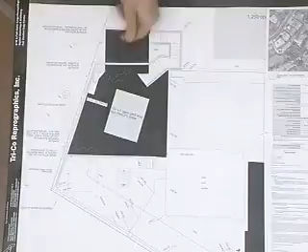Anything else you want to add, or we'll just go through questions and comments? Maybe we'll respond later when we have questions. Okay, at this point I'll go back to staff if they have any comments. No, not at this time.

Did you want to read the motion from the last hearing? Sure, Denise, if you could read the minutes from the prior meeting. We continued this indefinitely to the full board with the following comments: Number one, the board members, staff, and applicants will attend a scheduled site visit prior to the project returning to the full board for continued concept review. The board requests that the city-approved architect's plan set be available during the site visit. That was it.

Okay, so at this point I'll go to public comment. I do have one public comment slip only. If anybody else wants to comment, I'll need this filled out. The only name I have is Grace Dotson. That's not for this project. Are there any people in the audience actually speaking on this project? So I'll close public comment.

Excuse me, Mr. Chair, I did just want to... Oh, we had 3 additional letters, right? Yeah, there were 3 letters of support received: one from Mike Richardson, one from Phyllis Hollums, and one from Avo Submergian. Thank you.

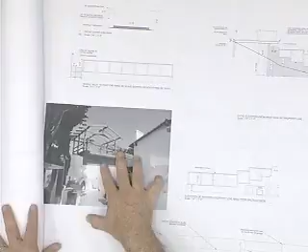When you do go through that process, you might have to come back for tweaks in the design. But basically what Fred is saying is the deletion of some items that are out there, or as-built items, and the incorporation of the rest of the items that were not permitted are basically acceptable.

Mr. Chair, if I may address Bernie's comment. One of the things that we can do, at least under the Robert's Rules of Order that I know about, is there is a motion on the floor that gives general direction and approval right now. But if there are specifics, say for instance the glass issue on the railings, someone can make an amendment motion to the motion. We can vote on that if it's a specific item, and then we can vote on the final motion. So if someone wants to make a motion specifically on the glass closures or comments, then we can add that in. I mean, that's certainly a possibility.

Sure. I have a comment on that. I'm thinking, even though it's probably not permittable, that if you do change the glass to something else, it's going to be more invasive, more noticeable. So the more subtle these designs are, the more appropriate it is to the cohesion of the neighborhood.

So you're in favor of the glass? I am in favor of it, yes. I'm in favor of it. Anybody else?

Okay, so your motion, there's a second. Any additional comments on that motion? I will ask staff to indicate whether the project will be coming back to full board or consent once it goes through the staff hearing officer. It should go back to consent, if it doesn't change dramatically, yes.

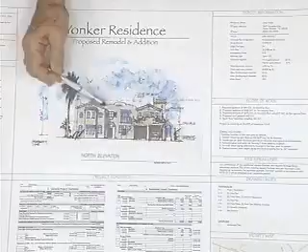What I'd like to do is start from the initial submittal, then quickly go through and show what changes we've made. The first submittal was with no arcade across the front. It has kind of a Mission Revival style with some Moorish details across the flat roof. And also we eliminated the enclosed stairway that goes to the upper deck.

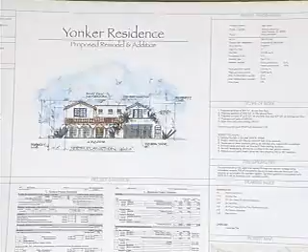So we were able to make an arcade across the front, and instead of going with a tile shed coming up, when you recess the second floor, what you usually see is a tile shed that comes down. That's the typical thing you see around town. What we've done is put a green roof in so the greenery will spill over the balcony and the wall. Aesthetically, you get a much more pleasing feeling.

Well, this is the existing site plan. We did initially submit this July 6th, 2010. In the meantime, planning had suggested that we go through and get environmental approval before we come back with any additional drawings.

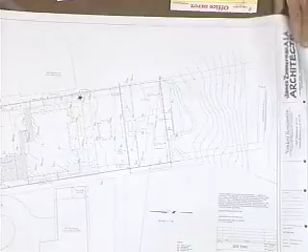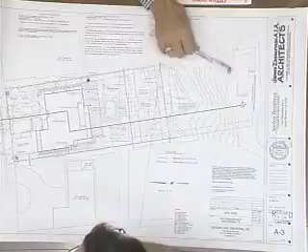I'd like to also show you that the setback is 20 feet, and we're 32 feet to the arcade, and about 26 feet to the garage. So we're well over the setback from the street on the front elevation.

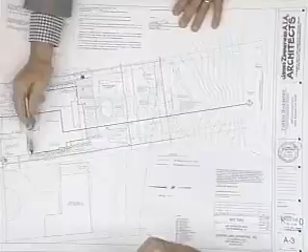The side elevation, we have the side setback. The side setback is 6 feet, and we kept the 14 feet. The existing garage was 6 feet, which we left where it is, and then we recessed the portion, which I'll show you on the floor plan. So this actually is 12 feet to this point, well beyond 6 feet.

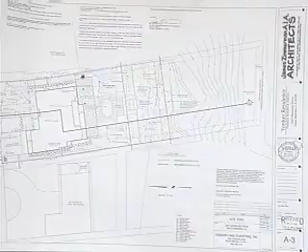So on the first floor plan, we have the stairs going up to the second floor, and then from the balcony you have a continuation of the stairs going up to a landing. Initially that landing was enclosed, so you had an enclosed stairway all the way up. What we did was bring that wall elevation down to the height of the landing.

The Fruckers, the neighbors who are present, were concerned about that wall being on the 6 foot property line. So on this showing, we pushed it back another 2 feet, and now the landing is 8 feet from the property line.

So as we go up, the floor plan has stayed the same, and we continue up to the roof patio, which is now 500 square feet. We had started on our first submittal at over 900 square feet, then dropped it to 700, and now we have it down to 500 square feet.

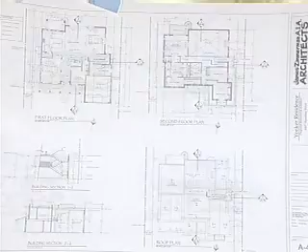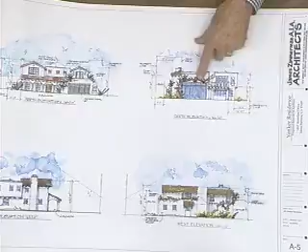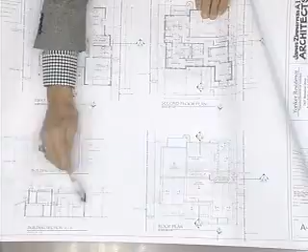The lowering of the windows on the rear elevation, we brought the windows down as far as we could to maintain the horizon line from the balcony inside. When you're standing inside on the balcony and looking out, down below there, it starts cutting into your view and cuts the horizon line off. So we brought that down as far as we could.

And also we added the trellis, which I think design-wise lowers the look of the windows themselves. We also broke up the doors with a horizontal piece coming across at about 9 feet.

The circular stairway going up, my client would really like to keep that. He has 4 small children and would like to have another way to get off the roof deck instead of going down the main stairway, in case of fire or something else that might happen.

And the board, I know, has been against stairways up to decks, whereas this is a stairway down to a balcony. It doesn't go down to the ground, it goes to the balcony and then back inside the house. So I think there's a big difference there.

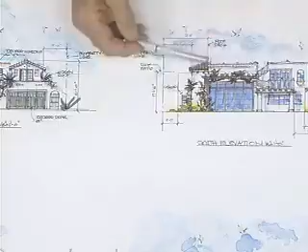Also, you can see that the roof patio is actually 21.5 feet from the property line. It's well beyond the property line. 15 feet is required, we're at 21 feet. And when you look at the height of the tile coming up, it gives the neighbor complete privacy.

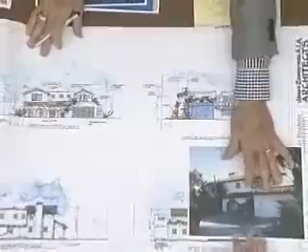I'd like to show you some of the houses in the neighborhood on compatibility of this design. This is the Fruckers house next door, which is a 2-story house. This is a house across the street. All these houses are within the 20-foot front yard setback. I think this design has neighborhood compatibility, and I think it will fit in very well.

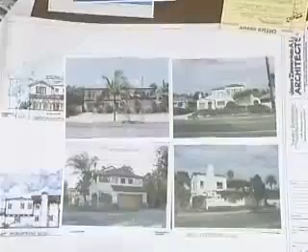I did mention that we do have environmental approval. What we have is a geologist that worked out all the drainage and the top of bluff, and it works out very well. We are submitting a landscape plan for your approval, and that's the only item that's left for environmental approval.

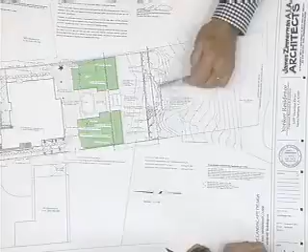What we have is a block wall that's about 18 inches high, and they wanted us to remove that because it wasn't permitted. So we will remove that, and then we will re-landscape this area. Also, the owner had put in a guardrail that comes out like this - this is the guardrail - and we're required to move that back 5 feet from the top of the bluff, which we'll do.

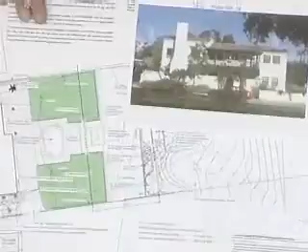I would like to emphasize, looking at the houses in the neighborhood, we certainly have neighborhood compatibility. One other item is that we're 15th on the square footage on the FAR - we're the 15th in the neighborhood. And that's my presentation. Thank you.

Are there any staff comments on this project? Yeah, thank you, Mr. Chair. I just really want to make a quick clarification regarding the process. This has been submitted for a DART application.

It needs a coastal development permit for work on the bluff, and there has not been any environmental approvals yet. It's just been deemed that the application is complete to pursue the Planning Commission hearing for the coastal development permit. The approval of the environmental review will actually happen at the Planning Commission with the Planning Commission approval.

So that's just a clarification. Okay, so our comments are just going to the coastal. Yeah, this item is for comments only, so you just want to make comments. If you find it acceptable as presented, then you'd want to make comments to forward it to the Planning Commission, and if otherwise, return it to the full board if you have any changes you'd like to see before it proceeds to Planning Commission.

Thank you. So at this point, I'll open up public comment. I have one public comment slip now for Grace Dotson, and if you could sit right there, you'll have basically 2 minutes to express your comments.

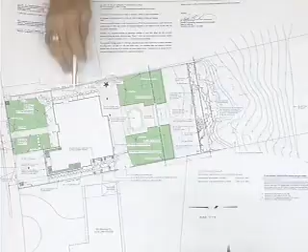Could you briefly explain how the water and the bluff are being treated, and where drainage is going? Well, what we're doing is we have drains in the lawn that go to a well, and when that well gets full, it overflows. Also, all the gutters go to downspouts with underground pipes, and we have one on each side.

So you pump it and then it goes to the street? That's correct. And the only other question I had was the 85% FAR on the agenda—is that current and accurate? That's correct. Any other questions by any board member?

I have a couple of questions about the process. The geologist comes—what do they do? Initially, when my client bought the property, the geologist did a survey, more superficial, on how much erosion it would take over the years, and that report was good. Now, to find the structural setback, he came back and surveyed the water line and the slope where the water comes in.

What happens here is there is shale facing this way all along, and when the water hits that, it comes back out with no erosion.

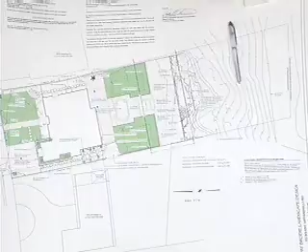Some of the lots, I think two lots away, had a slide. Their configuration in the front was completely different, where the waves came in and kept eroding on the deep portion, and eventually it slid. But this lot has a different configuration on the bottom of the bluff.

And Jim, if I say something wrong, let me know. The other thing that usually occurs is they analyze the soil at that point, not just the slope but the type of soil, which is why Jim referred to shale. There's a whole calculation process that determines how far back—first they establish the top of the bluff, then they establish a setback from it.

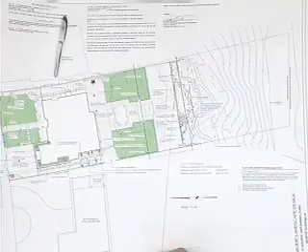Isn't there, just curious, a 50-year line and a 70-year line—how does that tie in? This would be considered, I think, a 70-year setback. That's why they don't allow any structural items on this side of the structural setback—they have to set a structural setback. If we wanted to, we could build out this way, but we're only building out 5 feet.

Thank you. Does that answer it? Yeah, that answers that. Do you have another question? Let somebody else ask. Brian, do you have any questions? No. Denise? Fred?

Yeah, I'm just trying to figure a couple of things out. Let me use that drawing over there. On the plans, it shows this staircase cantilevering out away from the front of that balcony. Yes. And so would you see that over here? You're going to see part of that over here? You probably would, yeah.

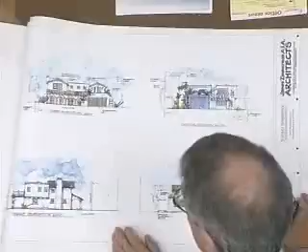Maybe you've got it drawn—what does that look like looking that way? Is there a section looking that way through this width? Let's see—is it back this way? Is that what this is? Yes, okay.

Or is that the other one? That's the other way—I couldn't figure out what that really looked like. Well, this would be through the stairway. They both look that way. Okay, and then I guess the stairway would be partially exposed.

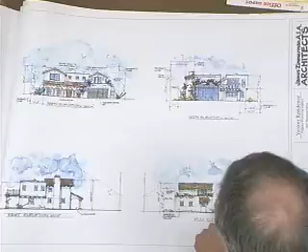And then the other thing on this elevation—this little cover over the door—that eave is even with this wall. Well, this would be the finished floor, with the staircase on this wall. So that little eave overhang is happening right over here, even with that—that's the entrance to the garage. Okay, thank you.

Jim, I wanted to bring up the comment the neighbor made about privacy or visibility from your property to the deck. What happens here is this tile roof is built up, and you actually have 6 feet to the top of the parapet. When you're standing on the roof patio, there's no way they could see into the property line.

So I don't know if you understood that, but what Jim just said is, you're standing on the deck, on the roof deck, and the tile roof along your side of the property is basically 6 feet above the deck. So if a 6-foot person was standing on that deck and you were level with it, you still couldn't see a person there.

It was a bedroom window that overlooks our bedroom window. From the second floor, you're saying? Yes.

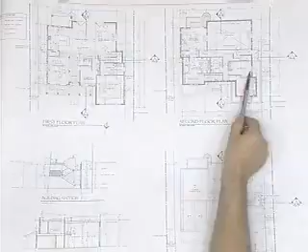I was just trying to address the issue of privacy from the deck, but we'll look again. On the second floor, there are 2 bedrooms. Only one of them has a window looking your way, which is this bedroom here. We originally had a balcony there, and Mrs. Dotson was concerned about that, so we eliminated the balcony. It's pushed back 12 and a half feet from the property line. It's a window, not a door or a balcony.

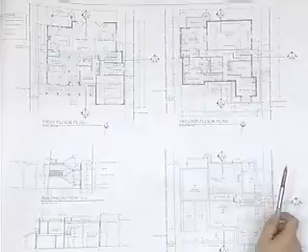But given the configuration of the rooms, there would have to be a window on that side, on their side. Does it still have a little balcony? No, the little outside space? No, we eliminated that.

That brings me to another question. You mentioned a green roof. Is this entire area a green roof? Okay, so coming around here, you will have plants growing up in front of the window also. That window will have to be a certain size to meet egress requirements for a bedroom, and we'll take a hard line and look at it.

And from that side, it's this window right here. Yes, so it's just an average size window, not oversized at all. There's the green that you see coming through here, so it's not presented as a balcony or terrace on that side. I appreciate you changed to that. Thank you.

Is there any additional questions from the board? Mr. Chair, yes Bernie. My concern, and by the way, I think this is a great example - I know we're not in comments, but the neighbors, the architect and the owners have made modifications, and I think finally we get a project that meets our guidelines almost, and it's compatible, because of the give and take of everybody, so that's great.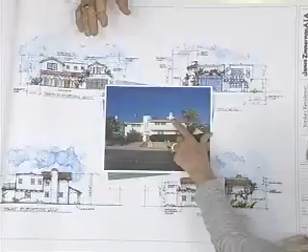I do want to talk about the roof deck, because I know this house across the street, I've seen people sitting up here, so I guess that's a roof deck. I want to understand, 500 square feet, I want to know if people are going to be able to see that from shoreline or from their boats, or is it completely down? It'll be completely obscured from the street. You wouldn't be able to see it.

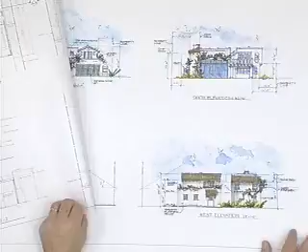One nice thing about this roof too is that we're cutting off about 5 feet of existing roof, so we've received good comments from the people across the street because that will increase their view. This is all in the back. What is this material? The stairway - I found a wrought iron stairway that I'll bring in, and it's very handsome. I think it'll look really good there, with the wrought iron railing above.

Okay, thank you. Let's move to comments if we could. Again, this is the 4th review. We've made some pretty good headway in revising the massing and simplifying some of the architecture and addressing neighbor issues as well. So, is anybody willing to make some comments?

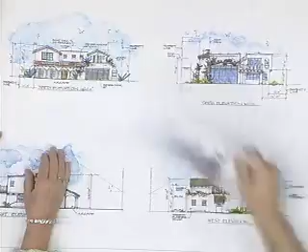I think it's an amazing improvement from the last iteration, and if you put your original picture up here next to this again, so that the public can see just what a change we have here - that's quite a difference from that to that, and I really, really do appreciate this design very much. Thank you.

And you've basically hit all the points that we had. The only thing you're retaining that we didn't really like was the little spiral stair, but I think it's compatible with the design. Thank you. Brian, how do you feel about this? I can support this project. Okay, Bernie?

No, I'm just going to look at my notes. Okay, so we'll move to Fred. Yeah, I can support the project. The only little picky thing is...

How that roof meets this element bothers me a little bit, but that's just how that comes together. And then that corner kind of bothers me - you have this nice thing going on here, but how that engages there looks a little odd. But in the realm of the overall project, I think it looks fine. I'll jump in on that, and I agree with both of those comments.

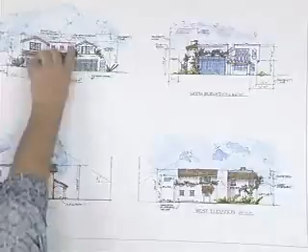And the way this is solved on this side might be a key to solving it on this side here, and the same could be done on those corners to get those a little bit away from the roof tiles and address some of Fred's concerns and my concerns.

So Bernie, have you given... Okay, I think we've really made a lot of progress, and it wasn't only Denise, it wasn't only that one, but there was another one before that. This shows that if we really stick to it and work together, we can get beautiful, compatible projects along the bluff top. How does everybody feel about that spiral stair going from a balcony to a roof deck versus coming down to the ground or grade?

I know that would have been a sticking point at one time with you. It still is. I would like to see if there are any alternative ways to do that. Well, you either have a stair or you don't have a stair, is kind of the alternative. Or a smaller stair into it. I'll just jump in - there may be ways of making it less visible, more plaster-like instead of more open. So that could work.

But Fred? I guess I'm less concerned, given its location in terms of its view from the neighbors to either side, and particularly because it's facing the ocean. Unless some sailor is really out there trying to figure out what's going on shore, I don't think it's a big deal. If this were in another neighborhood or a different condition, I might have more concern. But given where that little staircase is, we've run into this situation on other projects where the stairs were located along the side of the building, right along another neighbor. So this being not even going to grade and being in the middle of the lot, the visibility from the neighbors on either side is pretty minimal.

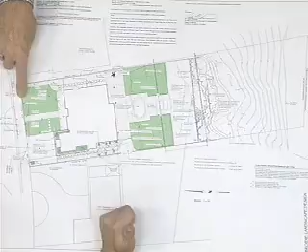So Jim, it calls out a new gate and it calls out a wall. Is that an existing wall? That's an existing wall, yeah. So you're just going to put a gate in an existing wall? Yes, and then there is a zoning violation at the corners that come up, so we'll be taking that down. But basically, you're keeping the existing wall plaster, modifying it to meet the zoning ordinance.

And then there's going to be a rock pathway up the middle, which isn't there now, coming into the arcade there. That looks good.

Okay, Mr. Chair, I did have a question. I thought on the application it said it was going to redo the front wall that's on the street. Yeah, that's what... is that correct? The corners will be lowered, but it'll basically remain a plastered wall painted to match the main body of the house.

And then maybe a question to Denise on the green roof on the top, on the west elevation. The concept sketch delineates planting falling over the parapet, so to speak, and there's about 2 feet between there and the wall of the second floor. I'm just looking at long-term maintenance of planting in that area - do you see any big issue with that? The plants chosen are aloes and portulacaria, which are both extremely drought-tolerant. Portulacaria will drape over the wall, and it has bright-colored flowers on it, kind of almost like a little miniature ice plant. But they're appropriate selections for that application.

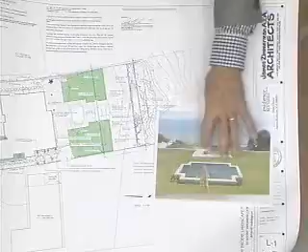Okay. Is anybody ready to make a motion?

Brian: I move that the board continues this project to the planning commission. We feel that the project is consistent with appearance and proposed development and fits the scenic character of the city. The neighborhood compatibility is good, the quality of the architecture is good, as well as the colors. The project's landscaping is consistent with the quality and compatibility with the neighborhood as well, and we feel that this does follow the good neighbor guidelines.

Thank you. Is there anybody willing to second that motion? Seconded by Denise. Comments under that motion? Brian, do you feel that this project would be able to come back to consent or full board if the design does not change?

I think it can go before consent. So if it does come back to consent, you mentioned colors. Was there a color board presented, Jim? No, I need to put that together. The colors you were referring to were just from the elevations. A color board will be required, and the general color palette that you see will be depicted there. So if it falls within these guidelines, I think it would be fine to go to consent as well, as long as the colors based on the elevations drawn are consistent with the color board.

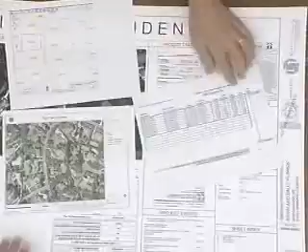And what I've done for this presentation is just take last November's drawings and mark them up in red. So all the changes are here. The proposed square footage has changed. Here's the FAR number. So, Dennis, can I stop you for?

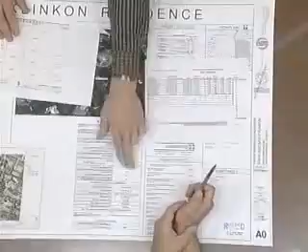Is this project listed in here? No, this one was excluded. Here's its number. So where would it rank? Oh, it would be number 1. Okay, it already is. So, without any addition. It's a large house, I think existing. What do we have? 6,000 some square feet.

So that's the comparative FARs. That's not an easy job to do. I hadn't done it before. It takes a lot of digging. Bear in mind a couple of things.

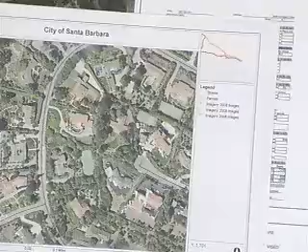These are just guidelines for this size lot. And also bear in mind, if you see the footprints here comparatively, this is one of the smaller footprints of the neighborhood. And what really throws this house into the larger FAR is a 1-foot elevation of its basement. If its basement was 1 foot lower, the basement would not be counted, and the house would be one of the smaller FARs in the neighborhood.

So if you bear that in mind, then you will see that the proposal today, after hearing your comments and the neighbor comments, first of all, I looked at a western addition, which would bring an addition out here on the main floor. It would block the view from this bedroom. It would require a hallway going through that bedroom that makes the roof line difficult. I just don't think it's practical. It also denies at least one of the rooms this fabulous view. The best view is to the west here.

So the proposal is to shrink the previous design, which was this footprint, from, I think it was about 1,200 square feet, down to 336 square feet gross.

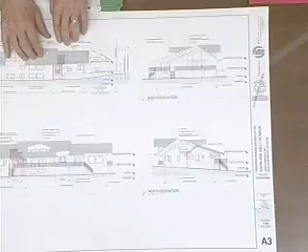In elevation, this wall moves in 19 feet. This former addition is reduced to 25% of that. This was the elevation everyone focused on, the one the neighbors were worried about, the one that got the most attention. So this is dramatically reduced.

The height of the addition is dropped 4 feet. I've penciled in green the height of the existing hedge. That hedge can stay - Danny Cato corrected himself after the meeting. For the next 3 years anyway, there's no enforcement of hedges.

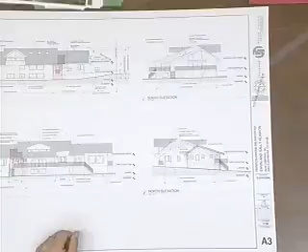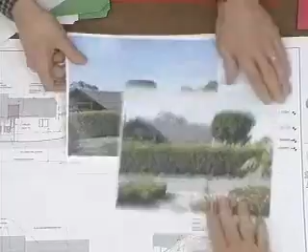Just to clarify this a little more, Mr. Klinkon did his best at simulating this roof corner. This is it from an elevation across the street in the neighbor's yard, I believe - directly across. This is what you see when you move a little further. I believe this is from his living... this is directly from Dr. Vogel's living room.

So one hardly can see it here. And then to the... we've got one more view, right, left. In that case, this is from Dr. Vogel's - these are all from Dr. Vogel's house, so it's this little bit. Now, I think that's interesting what Dr. Vogel sees, but here's what you see from the street - you would never see any bit of that addition from the street.

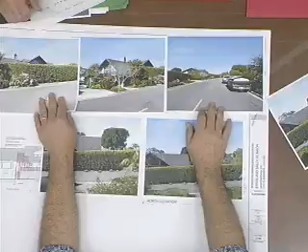So Dr. Vogel himself said that this wasn't about him and his house - this should be about the Klinkons. And this is, I think, a reasonable addition. They've scaled back their program, and they're going to consider an elevator to take advantage of all 3 floors. This gives them what they need.

So that's the proposal. The neighbor association is here - they have a presentation to make. They've seen this, they've looked at it. If this is an approvable massing, I'll come back in a reasonable amount of time with windows, doors, elevations and notes. Is there anything else for your presentation? No. All right, thank you.

Michelle, any staff comments on this? I know I have some public comment to deal with here. Okay, so we'll open up public comment. I have one slip from Bob Swanson. That's me. If you could sit there, sir. And you're from the Homeowners Association? Yes, I'm Bob Swanson, and I'm the Campanile Homeowners Association Architectural Review Committee Chair.

And I'm here to support Mr. Klinkon. As far as our CC&Rs and our neighbors, we feel that the reduction he has made in the mass of this addition is a very generous compromise. We have vetted this with the neighbors - they're happy with it. So we would like to sign on and say we support his ability to make this small addition.

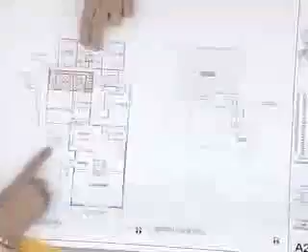It's the red - so this zone is in lieu of this. So we've eliminated the laundry, an extra bedroom, and an extra bath, and we're going to make double use of that bath. Oh, okay, that deck is still in the proposal. Yeah, and then on the site plan - this is the roof line of it here, proposed roof and wall below. So none of this is being proposed? It's an extension of this roof then - this roof just grows out a little bit, and then it has a lower ridge line than the big ridge.

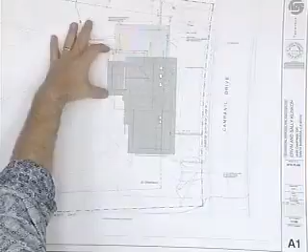Okay, any additional questions? Fred? Dennis, on the addition, what probable use is that addition going to be? This will be the study and the closet.

So the study, what's going to be left out is the library, the laundry room, the new bathroom, and the new bedroom. So in fact, this will stay bedroom. We'll get an elevator in here at some point to access a laundry room in the basement, and there is a virtual library on the third floor. So these three functions will either be on this plan.

What's going to be here is the study, which will be heavily occupied by Mrs. Klinkon, and she'll have the advantage of that view.

And you're not anticipating any balconies or anything like that? Well, we actually are talking about a good-sized balcony here, perhaps with a hot tub. I haven't shown that because I didn't think that was the primary issue. The primary issue was the...

And so if you did do that, what level would that come off? This level, which level? This is actually below street level. Okay. It would be invisible to everyone except outer space.

Okay, and just to follow up on Fred's comment, your balcony - is it a true balcony or is it going to be more like a deck, an extensive deck with a hot tub in it? Okay, at mid-level, which is below street level. And I haven't drawn it because, again, I thought the main issue was let's see if this is an approvable design before we start embellishing it.

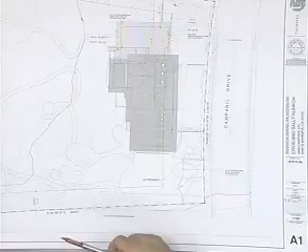Well, I don't think you'll have an argument on the board that this is not an improvement to what was there before. We just want to make sure, if there are things on the plan that we don't see yet, we can't comment on them.

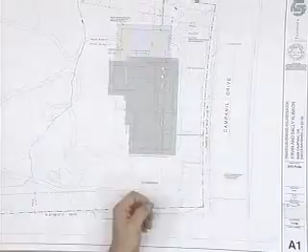Sure, I understand. But the deck doesn't necessarily go into the setback or within 20 feet of the setback. I think it would be smaller than this previously proposed footprint. Okay, and there is a massive hedge right here buffering them from the next neighbor.

And then following up again on Fred's comment - the elevator is not going to project through the roof? Oh, no. Okay. This would be...

Additional questions? So just, Mr. Chairman, may I just - wanted to make sure everybody realized that this deck is still part of the project as well. And this here as well, or this extension? I think so. I mean, the deck's here, so we may rethink that when we look at this deck. Yeah, you may not want it there. Whether we need that extra 2 feet, I don't know.

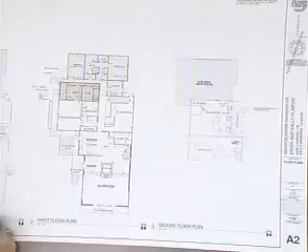Now, this was previously going to be a family room. Now it's a bedroom, I don't think it needs to be bigger. So we'll wait and see. Okay, any other questions? We'll move to comments, please.

Mr. Chair, I'll start. I think this is a huge improvement and in many ways a big sacrifice on part of the applicant, but I really appreciate your ability to listen to the neighborhood and understand the dilemma you're in, in terms of trying to make this house last forever for you.

I guess then just a comment about the windows. I think the reason we got into the discussion of changing the windows is when we thought the hedge would have to come down - I think that's what was precipitating that comment. But now that we understand the hedge is remaining, I think, in my mind, the windows are less of an issue. But it will be interesting to see window location for the addition when it comes back.

Thank you, any other comments? I'll follow - from what I viewed on the tape, I got a pretty good handle of what the board's reaction was, and it seems, like Fred said, a huge change, and I think it's very successful. I could support what I see, not necessarily what I don't. But I think it's a very, very good improvement, and you're going to save a lot of money too.

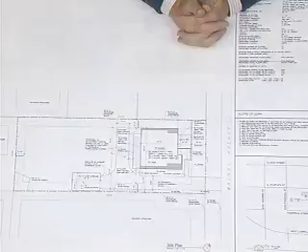We were, in fact, thinking of taking this to the next level and doing some multifamily work on the property. However, it turns out that we seem to fall in the new 250-foot setback from the APCD from the edge of freeway paving. So if it touches your lot, you are affected, no matter how deeply it goes on the lot, is my understanding.

So we are back at the single-family board, and for the foreseeable future, we will remain here, I guess, is what we've discovered.

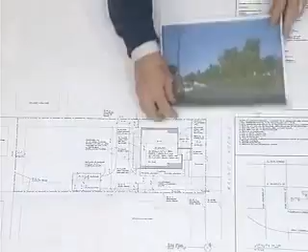But if I could, I'd like to kind of walk you down the street. This is a street that runs along just to the east of Southern Pacific Railroad's right-of-way. The train tracks are there to the west. US 101 is beyond that.

There is no paving on that side of the street. The city has a 6-foot chain link fence that runs the entire block, planted with some vine pockets, some trumpet vine growing up there. Occasionally there are also some trees, but largely along the street you see the vines.

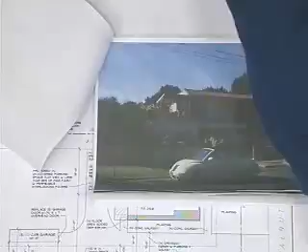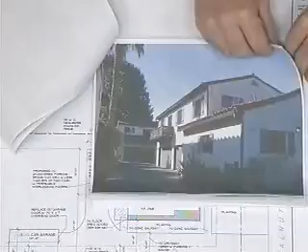Starting at the south end of the street, moving up, we see a number of two-story stucco, Spanish tile buildings. We were talking a little about compatibility of that. In fact, all the buildings along that street, with the exception of one, really are the stucco Spanish tile type buildings. This was the first building on the corner.

This is taking a look at each building as we go. First building on the corner, second building from the corner, third building from the corner. This is the building next to us, the fourth building from the corner. This is our adjacent neighbor. This is another shot looking further back into the site, just to the south of us. This is our property.

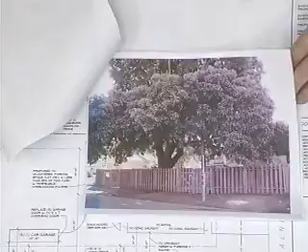Sorry about my printer running out of ink. Then the site just to the north of us has what I've been told by the neighbors is the largest avocado tree in Santa Barbara. Is it 4 foot diameter? Yes, this one is huge, okay. It's a huge tree.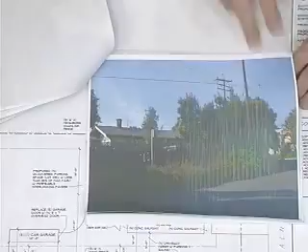So pretty much fencing along that side, the avocado tree behind it there, and then the house located really up to Anapamu Street, quite a ways away from Walnut and from our property.

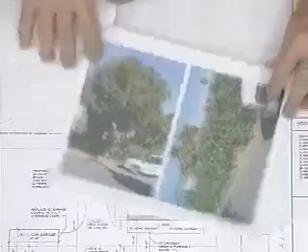This is the corner looking directly at the end of Anapamu. There's a pedestrian overpass to the freeway that spirals around there, looking at the building across Anapamu. Also, I wanted to show you a little bit of a close-up of our fence across the street with the city's trumpet vines, the chain link fence, an oak tree that is directly across from us.

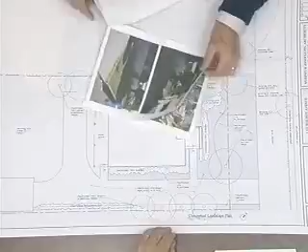Maybe I should skip the landscape plan so we can get some of those work. Oak tree across from us, the 6-foot chain link fence with trumpet vines trailed on it, and some of our existing vegetation, bougainvillea up against the fence there, a fairly large grouping of bird of paradise that's existing on our site.

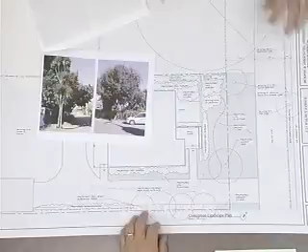A fairly large Yucca gloriosa, I believe, about 12-inch diameter, existing here just beyond our property line in the street right of way. Again, looking at the 48-inch or 4-foot diameter avocado tree beyond.

We restudied our building to a certain extent and tried to accommodate some of the board's comments: setting the windows in, thickening walls at windows, removing the little eyebrows over the windows, being a little more traditional in terms of the way the wall across the front continues as part of that entry porch element, so the wall continues clear over to the property line rather than transitioning to a wood fence that we had there before.

Screening off what's happening at our little patio here. Our front door is well hidden by the front entry porch. Reworking a little bit the way the pot shelf happens at the kitchen window, screening that again with planting down the driveway.

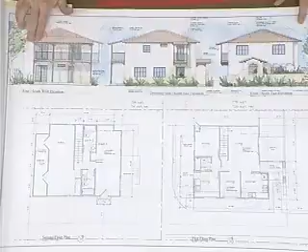Taking the board's direction on continuing the back porch all the way across, putting a roof on that back porch, doing a little pitch break so that the roof breaks down to a slighter pitch across there, and roofing that upper deck and continuing the porch all the way through the back. Restudying the scale of the post supports on that back deck area.

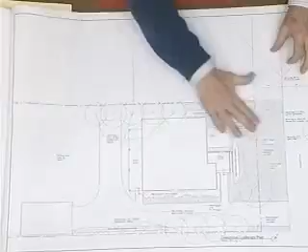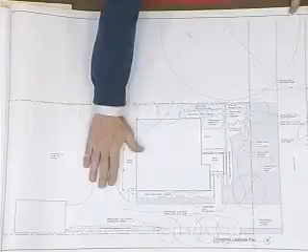Taking a conceptual look at the way the landscaping might work. None of the adjacent properties have any improvements in this street area, so my thought was to, like the neighbor next door, simply continue the ground cover out there, provide a tiered landscape approach with some low plantings, then some medium plantings against the site wall, and maybe an accent tree. We talked about some screening trees to screen off windows close to that property line, also the balcony, screening that off from the neighbors, although that house is set considerably away from us - that's where the avocado tree is. Screening off also the parking, trying to screen the existing garage back there as much as we can.

Let's see, I forgot... Trying to simplify the elevations a bit, and went to maybe a crenellated, scalloped, plastered detail at the cantilever there. Hip the roofs to make the building a little softer.

I think that concludes your presentation? I think so. I probably forgot something. All right.

Any public comments? You already had some on this project. Let's move to public comment. Oh, you do have staff comments?

I just wanted to emphasize again regarding the parking. The board had spoken previously regarding whether it was appropriate to build a new house and keep the existing non-conforming garage. I wanted to clarify, from a planning perspective, when you are proposing a new complete house, you do have to bring parking into conformance. That would mean providing a two-car garage or two covered spaces, or in this case, as they're proposing, one covered and one uncovered space, as an exception for having a residence less than 85% of the FAR. However, it is still the board's purview to suggest whether or not it's appropriate to maintain that existing non-conforming garage, and whether you'd like to see a garage, attached or detached. I'd like the board to specify that in whatever motions they make or comments they give. They are at this point, as I believe you are, requesting to keep that existing non-conforming garage in its location.

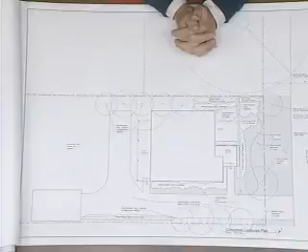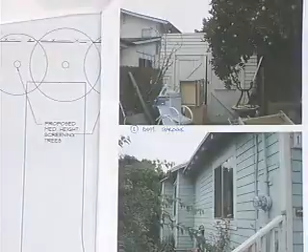So this is the view from this side. Yes. And it's a flat roof with a parapet around three sides, drains to the back, drains to this side, and sheds off. So there's a possibility, like you said, of just plastering that facade, the front parapet. Okay. Any additional questions?

Bernie? I was just thinking, why not think about a two-car garage, and then if 3 or 4 years down the road things change, then you could maybe put some units above the garage. Food for thought.

Okay, are we in comments? We're moving that way. Okay. It started out as a question. So let's move to comments.

How does the board feel about the garage? I mean, that was one of the items that Michelle asked us to make sure that we gave direction to the applicant for. Given this basically new house, and new style, how does the board feel about this existing non-conforming garage?

Well, Mr. Chair, I said this before. I think I really like the house as it is, as designed, and the garage will certainly look like it doesn't match and like it's out of place. And although I do understand the intent of the owner, and he can legally do this, so it's not like we could force his hand and say it's aesthetically unpleasing and make him build one that he has to tear down later. I still feel like that's sort of an exercise in futility, and given the area and the restrictions that they have to look at now, I think they're doing the best they can with the property.

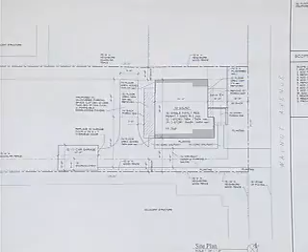I have a question for staff, though. It doesn't look like this meets the current requirements for height, even for a one-car garage. So would they even be able to do that? I doubt it. Well, again, they can completely demolish it and rebuild it as a one-car garage. It would change conformity, because it doesn't look like it conforms to what we would now build as a one-car garage—there's a certain height. Is it standard height? All you need is 7 feet of clearance or so. Transportation did review it, and they were okay with everything.

They just wanted to double check on that. So it's possible. And it's even possible, if we're willing to accept the modification to the design, they could accept the modification to the vertical height of it. So we could slope it—not saying that necessarily, but there may be a way of doing it.

Wouldn't it make more sense, if you're going to go through all that, just to demo the thing and build a two-car garage? It'd be cheaper, probably. What are you thinking, Jim? Well, I think there's room for a two-car garage. Sure there is. And I think the house is designed so that it could very easily be 4 bedrooms, 5 bedrooms, with 4 cars parked out in front.

But there is room to put a double garage in, so. There's no question about that. No question about that. I think I see how this is going to wind up.

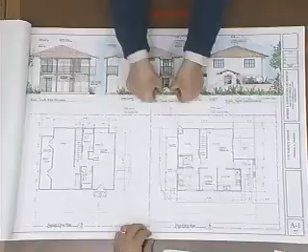There was a term I heard, and I've never heard it before, something about a pot, what was that? Pot shelf. Pot shelf, and is that through the open window and people are cooking? It's like a plant. There's some timber corbels that hold a little shelf there, and you put a little plant pot on it. Oh, it's like outside a kitchen window. Flower box. It's like a flower box. What you put in it, we don't know.

Question: the issue about that front 11 feet, it appears we're not able to do much, but are we collectively in favor of telling the applicant we could accept ground cover there, knowing that in reality that's not going to last too long, or how do you deal with that? What I think is going to happen is they might as well just not even do anything there and leave it dirt. If they do anything else, they're going to get slapped. So if it just remains hard packed dirt like it is in these pictures, there's plenty of pictures that show that right next door.

But I think from a review board perspective, they're anticipating some landscaping there, so this is the solution. Well, yeah, so you could do the ground cover, and it will indeed become packed earth at some point if they start parking on it. But look at some of these - see right there, just right next door, that's what that area looks like. So it's going to end up that way.

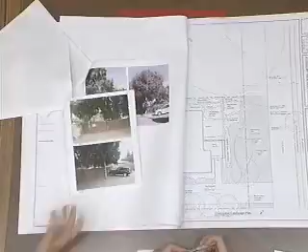Do we want people to park there, or do we? Well, you can't stop it, but we can discourage it if we can. But reality is, people are going to park there, so should we encourage the applicant to spend the money to plant plants that are going to not survive? Should we just tell them, don't, just landscape up to the property line? Unimproved, that's what I would do. So I don't know if we can add that, whether the motion maker will accept that as an item.

May I ask another question? Were you planning any kind of a fence line along the property line? I wasn't - just the six-foot one right there, to keep the cars from rolling right up to the front door, maybe, because they probably would if you didn't put a fence.

So Bernie, you were the maker of the motion, so are you okay with saying the board would be okay with not providing landscaping in the right of way? Is the board like that? Yeah, I think it's the only solution, really. Okay, and you're the second, so you're okay with that. I'm okay with that. Anything else?

We talked about the two-car garage, and we're going to let that be open to the designer as to how that works right now. Fred had a different comment about being attached, so he may not vote for this, I don't know. Oh, I think it'd be detached. If the applicant's willing to do a new two-car garage, I could live with that.